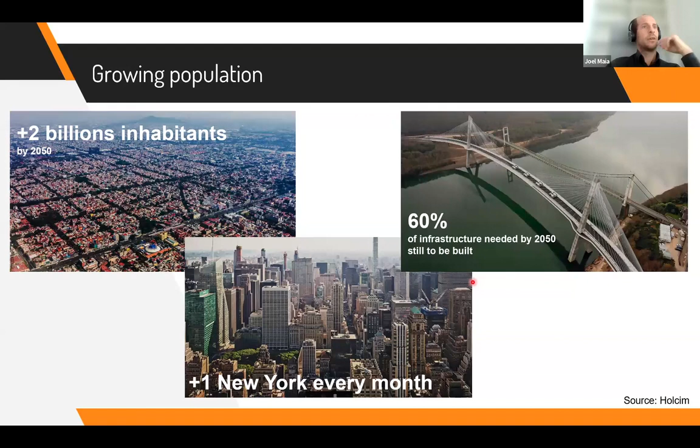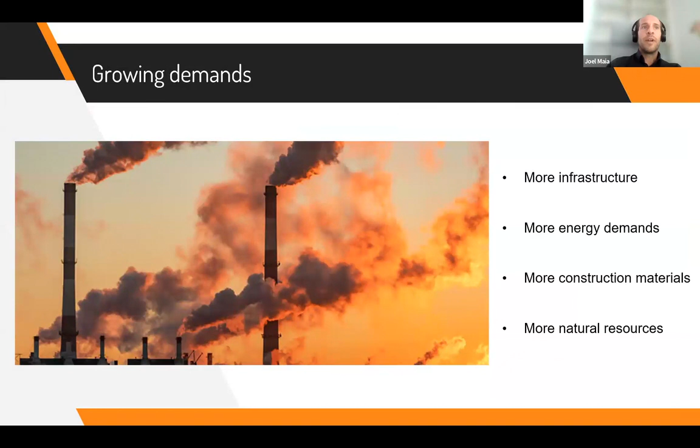Obviously, this growing population also brings some challenges for the planet. This means more infrastructure, more energy demands, more construction materials, and at the end, more natural resources are used for it. So what does this mean for us? This all has an immense impact on the environment, especially global warming, a problem we are all facing these days.

Sorry, this jumped to the wrong slide. One moment, please.

All right, and the question is, okay, are we doomed? Is this the end of the times? The answer is no. But this answer no comes with a big if: if we all do what has to be done. When we say all, it means as individuals. So if we look into the waste hierarchy pyramid, I think there's a lot we can do to avoid the environmental problems that we are facing these days.

Everything we can do on the top of this pyramid is better than what we have to do at the bottom of it. So if we can reduce the use of some resources, that's better. If we cannot reduce the use, we should try to reuse the materials. If we cannot reduce or reuse the materials, we should try to recycle them. All this we can do as individuals very easily. We should obviously avoid the last step, disposal, because this is what stays in the environment for many, many years. It's a combined effort from everybody.

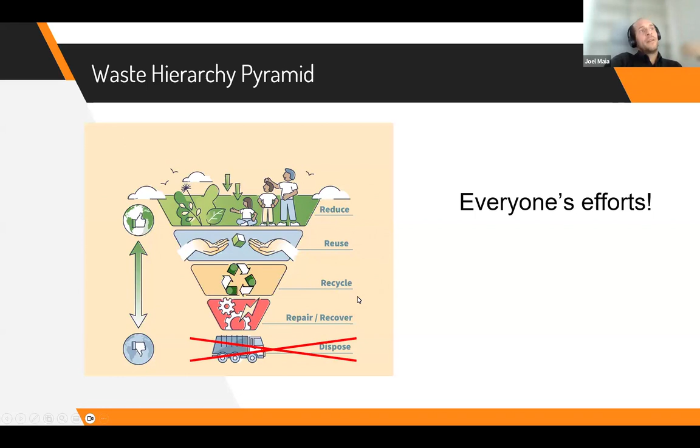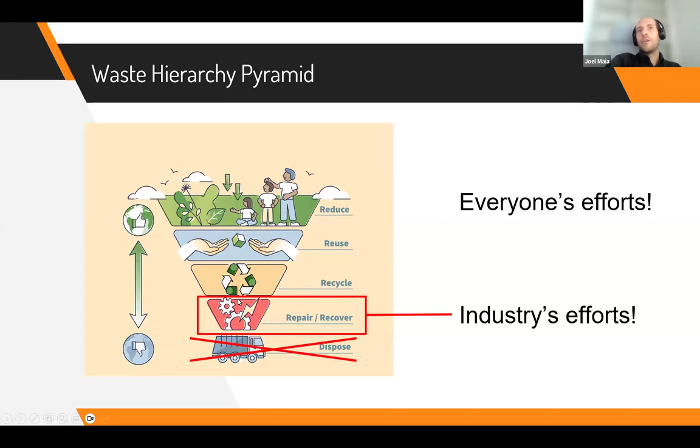Especially in terms of industry, that's where we are all working today. We are focusing on the repair and recovery of materials to be reused as energy sources, for example.

When talking about CO2 emissions, it's well known that cement production is responsible for 6 to 8% of man-made CO2 emissions. Here is a chart showing how this has evolved since the Second World War until some years ago. It has drastically increased. When we look at the million tons of CO2 produced by the cement industry, we can see that part of it is caused by process emissions.

So basically the majority of it is process emissions, from the CO2 from the material itself. Here we can talk about how to reduce it, for example with calcined clay. FCT is also working on the calcined clay business, but it's not the topic of this webinar. If you want more details about calcined clay, you can visit our website or send me an email, and we can schedule a meeting.

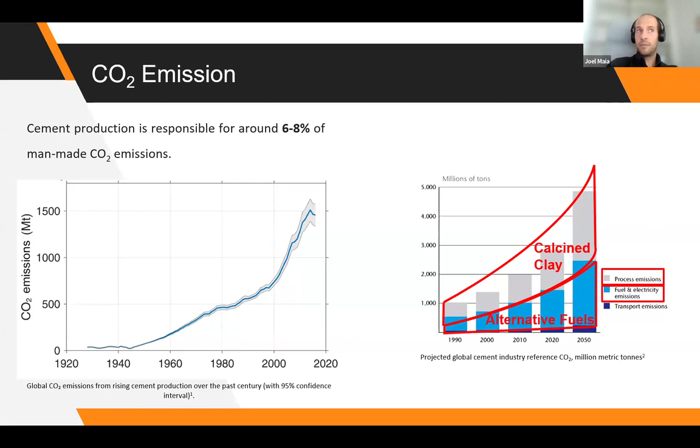There's another part, the blue part, caused by fuel and electricity emissions. Here, for example, one way to reduce it would be the use of alternative fuels.

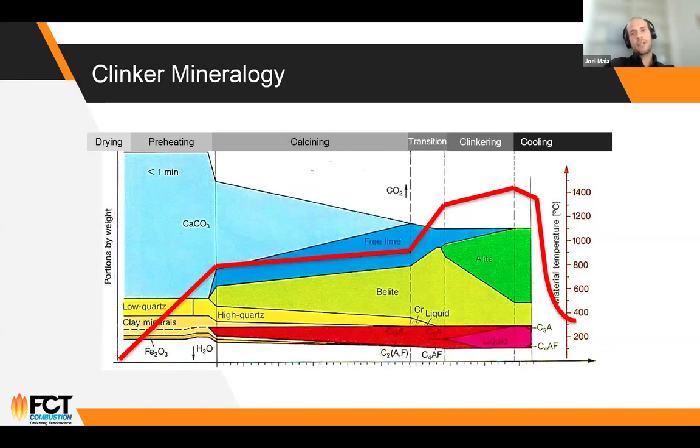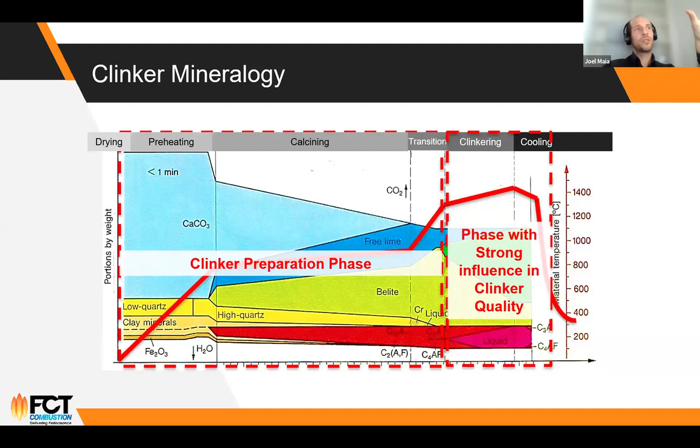We all know this diagram, the clinker mineralogy with the phases of the clinker. There are two main sections that should be highlighted. First, a preparation phase from the drying of the raw material until the transition zone of the kiln, where the raw material is being prepared for clinkerization. Then a second phase that has a very strong influence on clinker quality, and later on cement quality, which incorporates the clinker cooling. We need to make this division because depending on which phase, the alternative fuels will be used in a different way.

When we are talking about the first part, the preparation part, the calciner, choosing an injection point of alternative fuels in the calciner is like choosing a house. When you want to buy a house, you always worry about the neighborhood, the environment around it, the transportation around the area, and so on. For the calciner, injecting alternative fuels is the same.

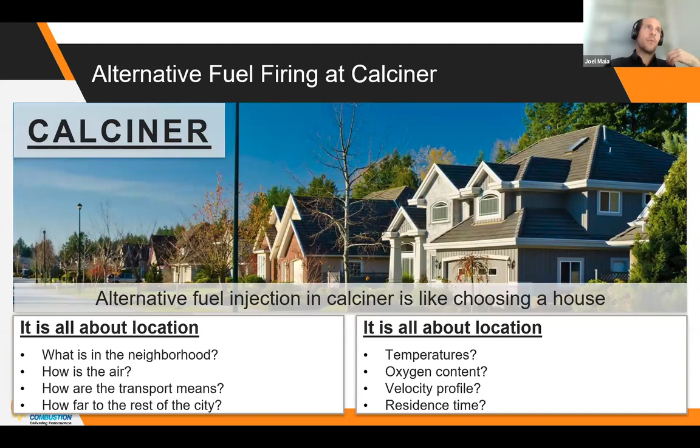So how is the temperature distribution in the calciner? How is the oxygen content in the different areas? What's the velocity profile? What's the residence time? Basically, you are more worried about the flow characteristics inside the calciner. To find the better position to inject your alternative fuels and be able to maximize it, one way to do this would be through a CFD study.

We can also look at results from some CFD studies we made in the past. This would be more for alternative fuels that have good aerodynamic characteristics, meaning they fly together with the gases. In other cases, when we are talking about complete tires and so on, we can talk about a pyrorotor, for example, or some other type of combustion equipment that can deal with larger particle sizes.

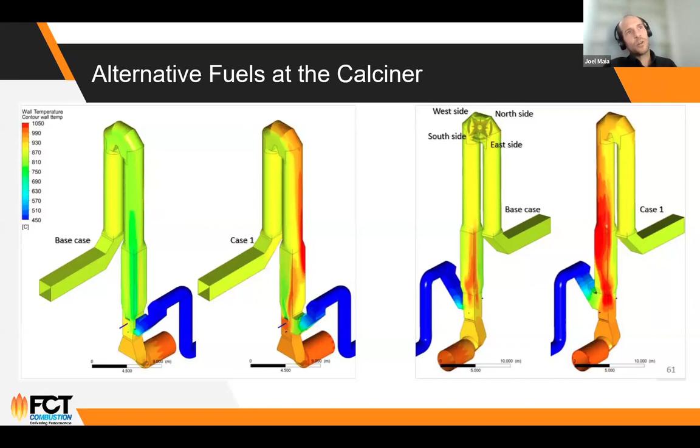But for smaller particle sizes that can fly very well, a CFD study is a good way to check if an existing calciner can deal with the intended alternative fuels, or if a modification is necessary - an enlargement of the calciner, or modifications at the top of the calciner for better mixing, and so on. All of this can be done through CFD. This is not covered by today's presentation. Today we will focus on the kiln.

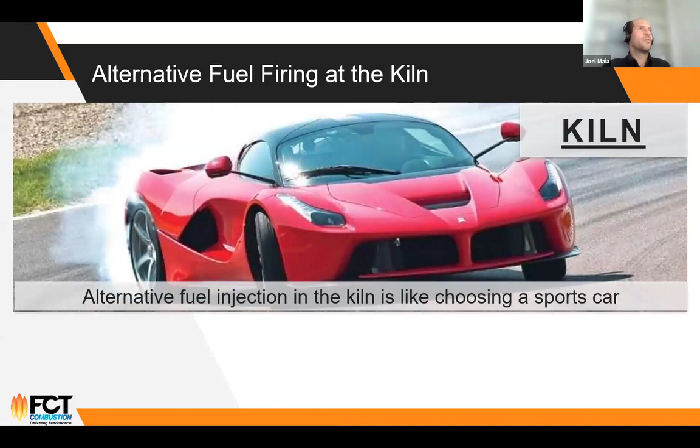There's a difference when we are talking about the kiln. We can make an analogy to a sports car. To my Italian friends watching now, you all know this car. Choosing how to fire the alternative fuels in the kiln is more about performance. If you would buy such a car, you would be worried about which power it has, what's the maximum speed, how efficient aerodynamically it is, how it can turn, and so on.

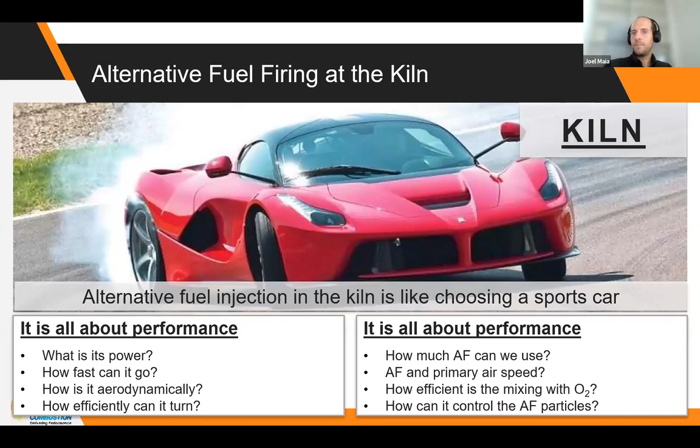It's the same about the burner. If you're injecting alternative fuels in the kiln, you are worried about how much you can use, what is the mixing efficiency of this burner, how you can control the alternative fuel particle direction, and so on. To inject alternative fuels at the kiln side, which is the main topic of this presentation today, there are two main options.

One would be to use a satellite burner in the kiln hood. Let me put a laser pointer here - so the alternative fuel satellite pipe would be positioned a little bit above the burner, in the secondary air. This is a good solution up to a certain point, because the secondary air has the majority of the air required for combustion. Above 95% of the air in the kiln is coming through the secondary air. This is a zone with high temperatures, around 900 to 1000 degrees.

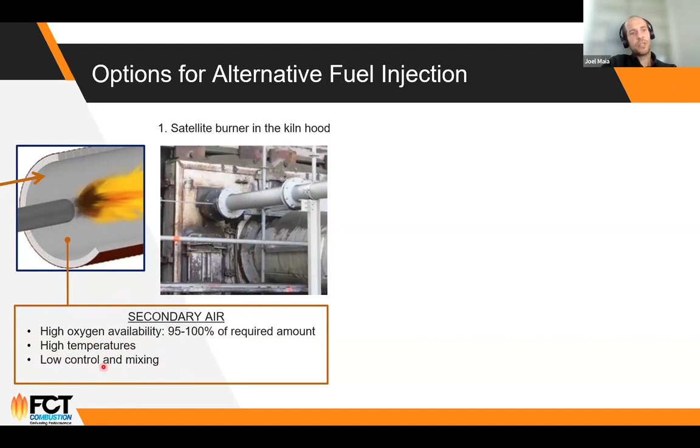There are some benefits to this solution. The main characteristic is that through the burner, you're injecting just a small amount of the air required for combustion—we're talking about 8 to 12%, depending on the type of kiln. At this zone, especially closer to the burner, you have lower temperatures. However, the main advantage is a very high control and intense mixing of the alternative fuel with the remaining air around.

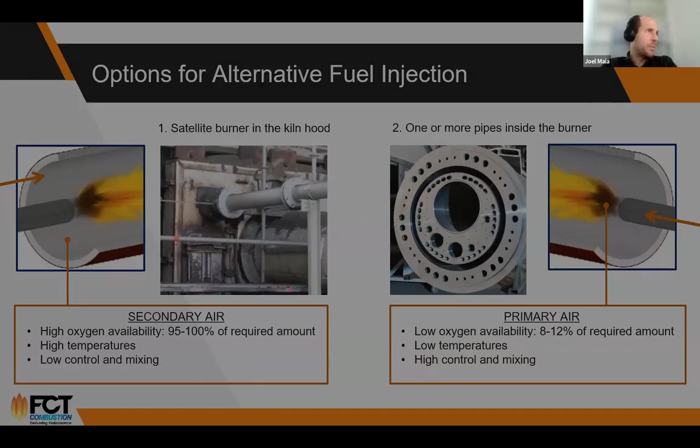Let's talk about the satellite burner first—option number one, injecting alternative fuels on top of the burner directly into the secondary air. This is a rendering of a typical satellite burner. It has an adjustable position in terms of angle, penetration, and so on, mainly to influence the flight path of the particles. You could adjust the position depending on whether you're using a heavier or a lighter particle of alternative fuel. This pipe also has refractory to increase lifetime, and at the front of the satellite burner there's additional air injection through holes, giving extra control over the flight path of particles as well as the combustion.

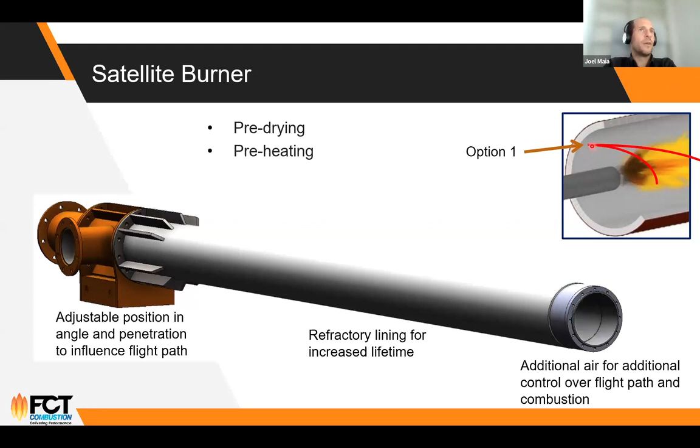The main advantage of this type of satellite burner is that since you're injecting the alternative fuel before it reaches the main flame, there's time between the injection point and the start of combustion, so you get pre-drying while the fuel is flying. You also get preheating, because the alternative fuel is injected into a very hot environment. It's very easy to install, so CapEx is very low. It's the ideal solution to start with alternative fuel at the kiln side—very cheap, very easy to install, fast—and you can get a very fast return on investment while decreasing CO2 emissions almost immediately.

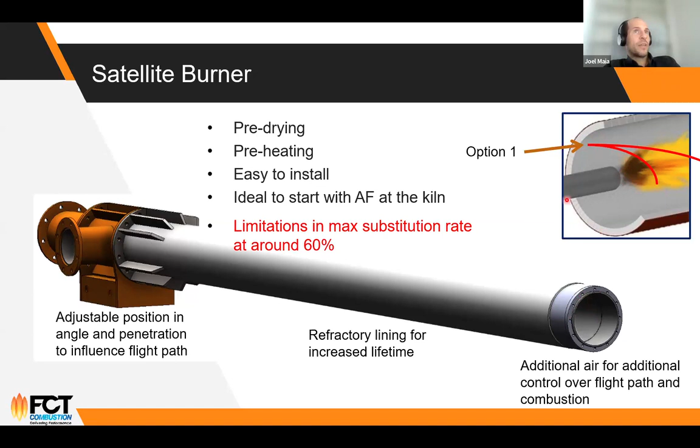However, there's a drawback. This is not the main burner, so when you look inside the kiln, the majority of the fuel should be in the center, but now you're injecting alternative fuel on top of it. So there's a limitation on the substitution rate you can achieve through this pipe. We've seen cases of up to around 60%, but mostly they're in the range of 30 to 45%. The majority of the fuel should still be at the main flame coming from the main burner. When you start shifting too much energy to the satellite burner, you're injecting more fuel through a burner that isn't as capable as the main burner itself, so it starts making not much sense.

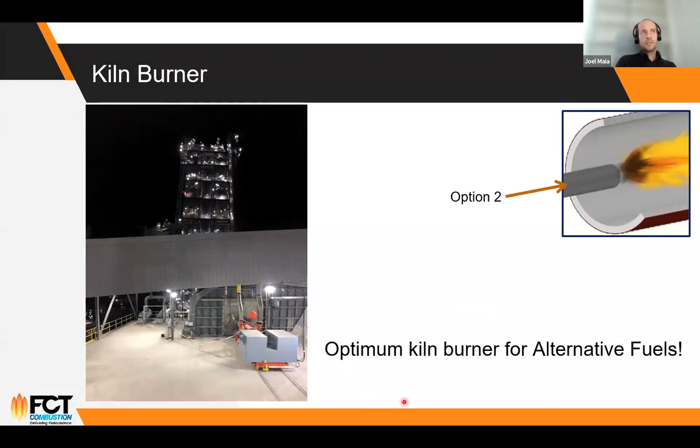Option number two would be to inject the alternative fuel through the burner itself, which needs a burner optimally designed for combustion of alternative fuels. Years ago, we started looking at what this optimum design means, and came to a question: what if we take a standard burner design, like we see here—with axial air, coal, pet coke, lignite, and a swirl air channel—and change the arrangement of the axial air?

So again, the same picture. Something is going on here with the presentation. Let me go back to the correct slide. I'm not sure why this is happening. One moment. Sorry for that. Let's try again.

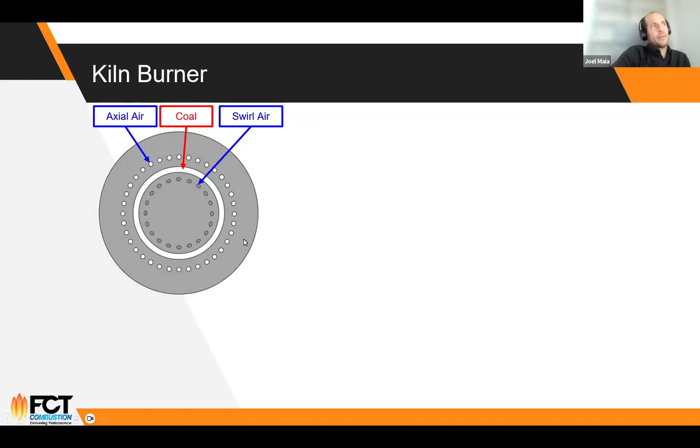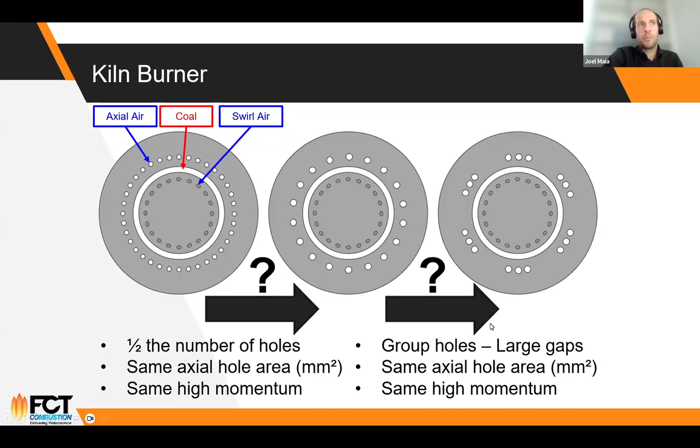Our question was, what happens if we change the arrangement of the axial air? First, we studied the difference when keeping the same amount of axial air, same injection area, same speed, same pressure, but just changing the number of holes—from 36 down to half, to 18 holes, a bit bigger since the area stays the same but the number differs. Then the next question was, what happens if we take these holes and group them three by three, leaving a large empty area in between? We have a CFD department in our company, so we studied this first in CFD.

So from the CFD, among many other parameters, we can get results like the radiation from the flame to the clinker. It would be a chart like this. Here at 0 would be the burner, at 17 is the kiln inlet, and on the vertical axis we can see the radiation from the flame to the clinker.

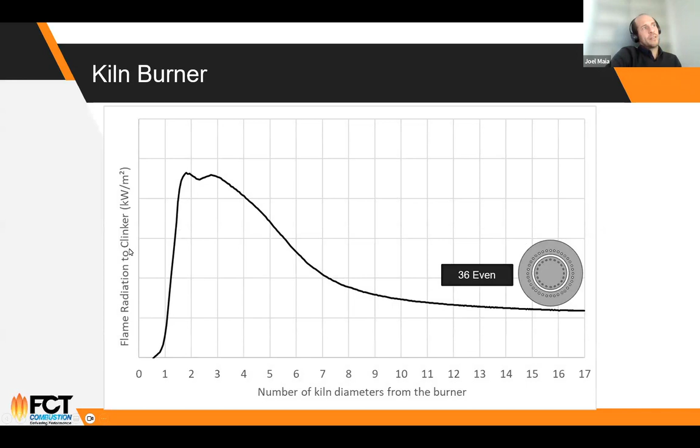From this chart, there are two main parameters that we can read. One would be the peak value of the radiation, and the second would be the area below the curve near the clinkerization zone, which shows how much energy is transferred to the clinker in that zone.

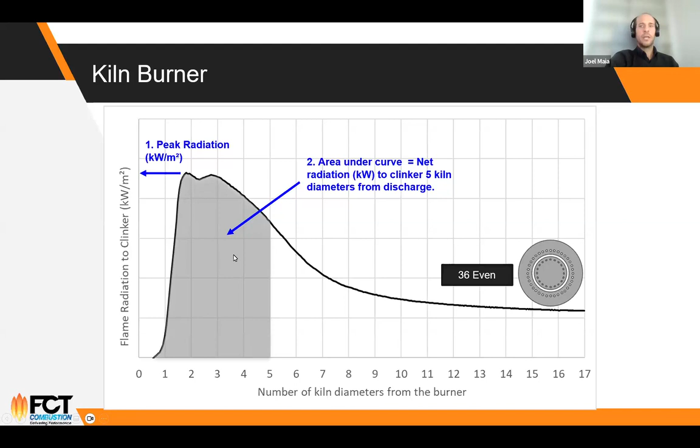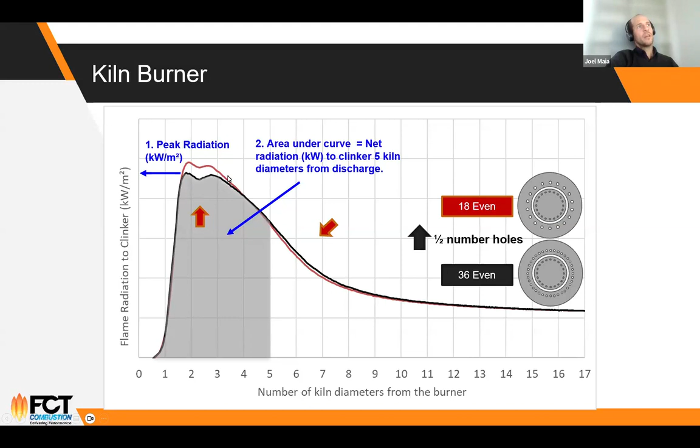If we look at this chart, this is the typical burner. We compare it to the burner with larger holes in a smaller quantity. We can see that the peak radiation increases, and the flame later, after the clinkerization zone, gets colder, so the flame is a little bit shorter. Comparing this to the next option, grouping the orifices 3 by 3, we see a further increase in radiation and a further reduction of the flame length.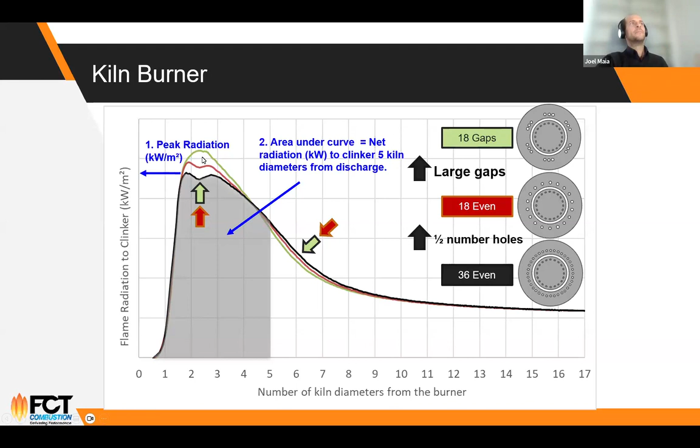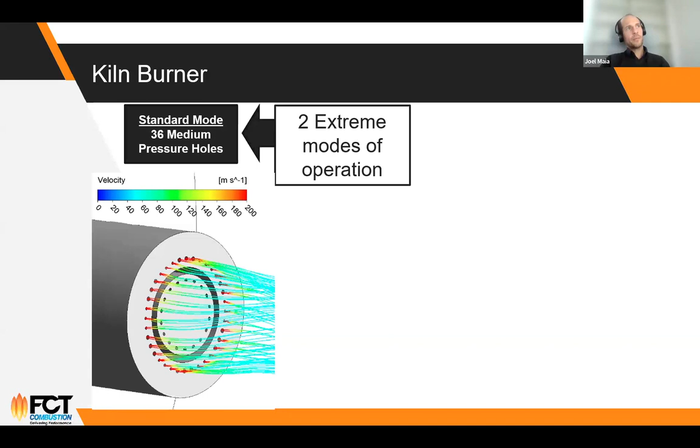So what was the solution that we found? We can have the same burner operating in two extreme modes. One mode would be what we call standard mode, in which we have air being supplied through all axial air orifices. This generates a milder flame, not so intense, suitable for operation with traditional fuels. Then, closing a valve outside the burner, you don't stop it, you reduce it to a minimum, because you still supply a little bit of air for cooling and to avoid clogging, but from process purposes this amount of air is very small.

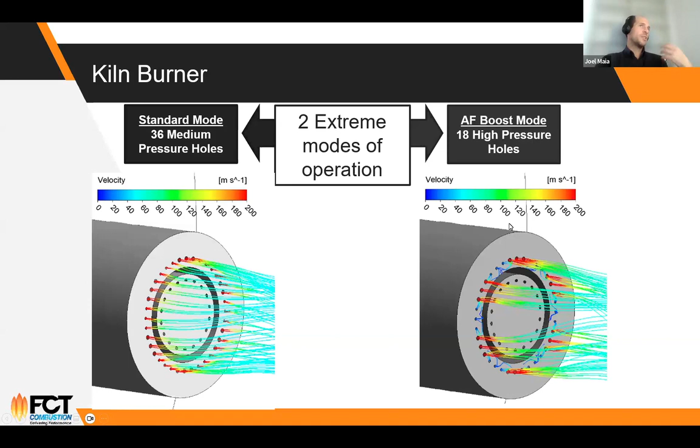And then you're supplying the majority of the air to these 3 by 3 orifices. With this, you create a higher speed, and also you create a gap through where secondary air is sucked inside the flame, giving you a much more intense, much shorter flame, suitable for the use of alternative fuels.

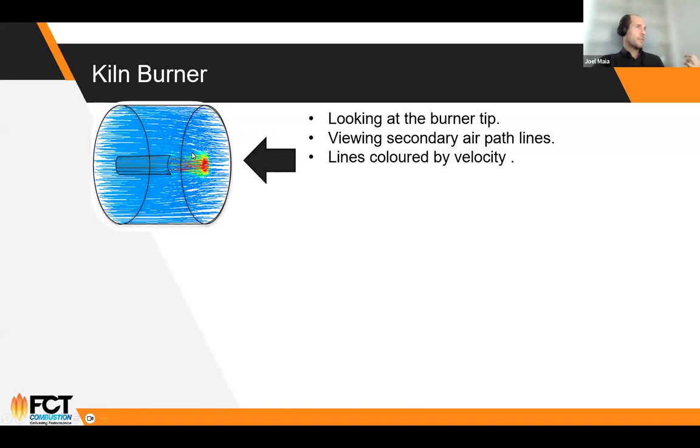Just to illustrate this a little more, these are the lines of the secondary air only, you cannot see fuel or anything else here. If we take a section a little in front of the burner, we can see that in the standard mode there is a certain quantity of air coming inside the flame. And when we engage the boost mode for alternative fuels, we can see that there's much more secondary air coming to the flame.

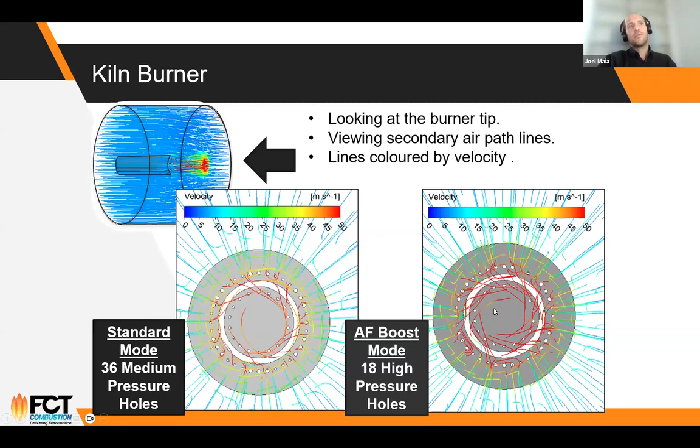This is especially important because, as I mentioned before, the majority of the oxygen required for the combustion comes from the secondary air. So the faster you can draw secondary air into the flame, the faster will be the combustion of your alternative fuels.

There are also other additional features, like some lofting air, as we call it, for alternative fuels. You can see these small holes injecting air at the end of the alternative fuel pipe, shown here in the picture. We divide them into two groups, the pink lines on top and the green lines on the bottom. They can be controlled separately, mainly because alternative fuels change from time to time.

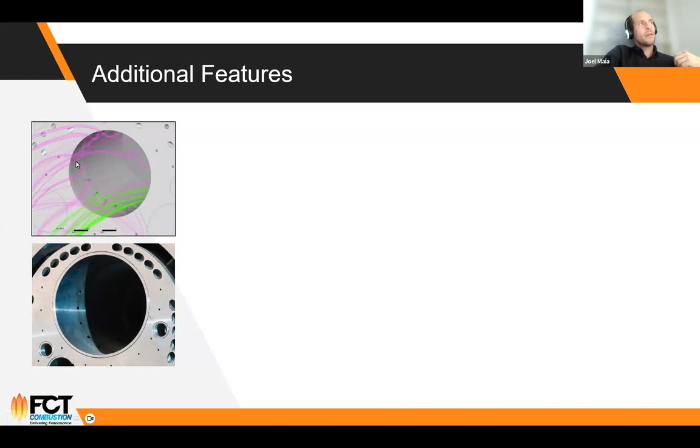If you're talking about a heavy, more 3D alternative fuel, we would use this green injection of air mainly to lift the fuel itself. And if we are talking about a lighter fuel, like a good RDF, we would use both the pink and the green, basically to disperse the fuel in all directions.

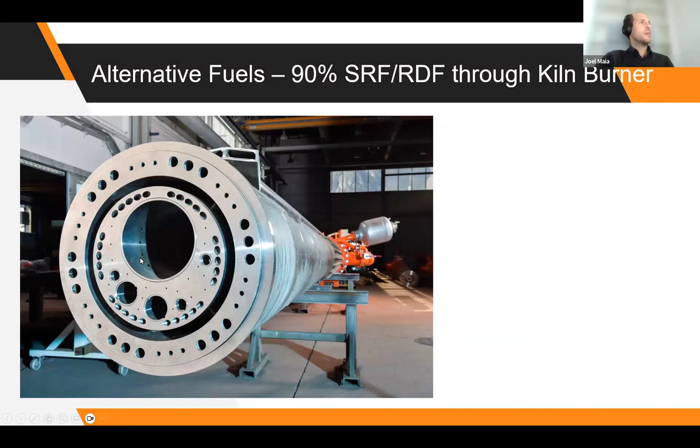This is one of these burners, TurboFlex, as we call it. You can see the different size and position of the axial air holes. You can also see the lofting air inside. With this, we can achieve up to 90% SRF RDF through the kiln burner itself.

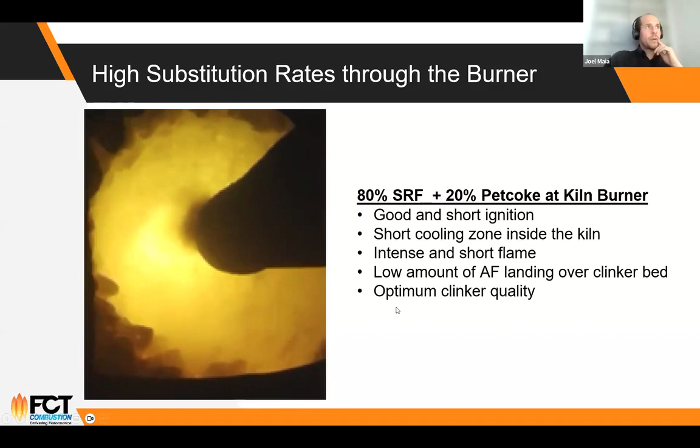So this was more or less the topic for today. I'll just go through the company quickly in the next 2 minutes, 1 minute.

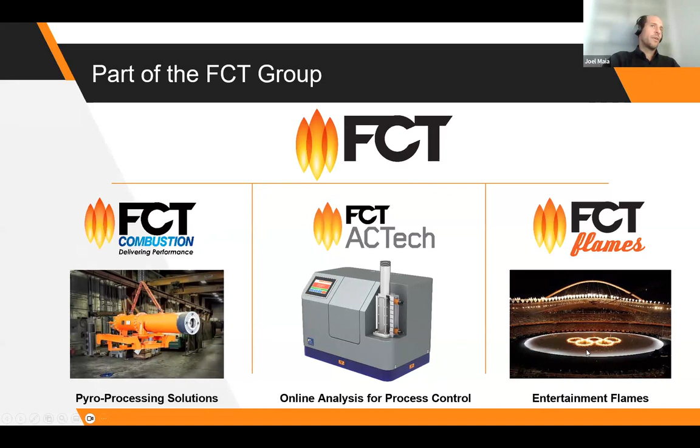FCT, we are a group of 3 companies. One is FCT Combustion, dealing with everything related to combustion for heavy industries, for example alternative fuels, kiln burners, calcined clay, hydrogen, and so on. FCT ACTech makes online process control equipment, and FCT Flames makes entertainment flames for Olympic Games, for example. Our company is from 1984.

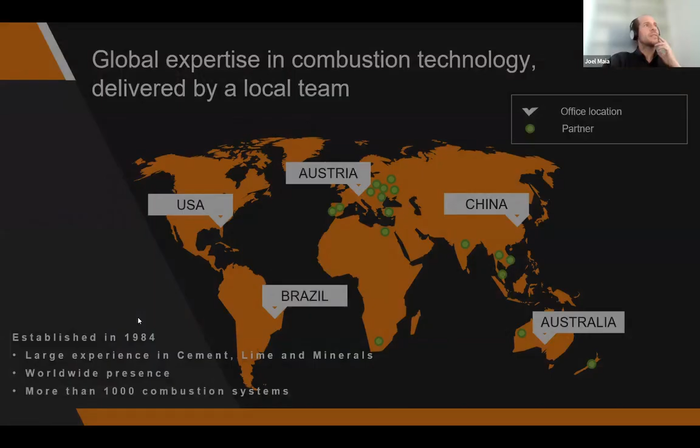We are experienced in several industries, mainly cement, lime, and minerals, worldwide presence. We can see our 5 main offices here on the screen, and we have more than 1,000 combustion systems as references. We are serving different industries: cement, iron ore, lime, pulp and paper, mining, lithium, bauxite, etc.

The main advantage of this is that we can make a crossover of technologies between one industry and the other.

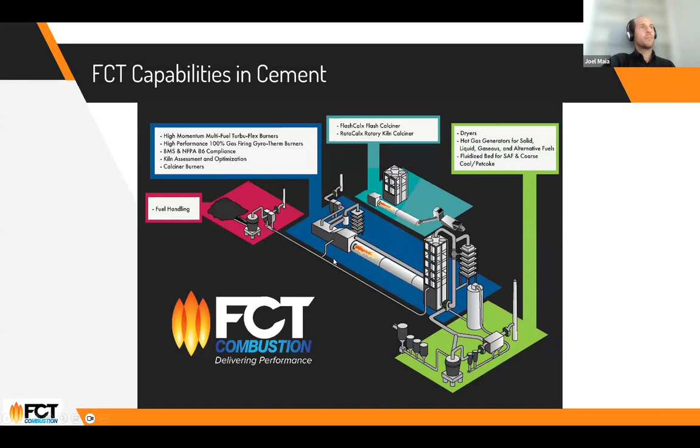Speaking about the cement plant, we have a group of engineers now able to help in different parts of the plant. So fuel handling, pyroprocess line itself, calcined clay, and gas treatment systems.

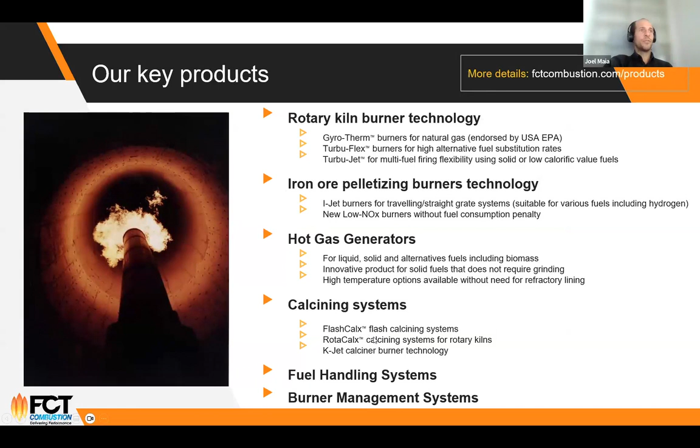Here are some of our key products. I won't go into details here for lack of time, but different technologies for rotary kiln burners, hot gas generators, different types, calcining systems including rotary kiln and flash calciners for calcined clay, fuel handling systems, burner management systems, different types of services like audits, CFD, and so on.

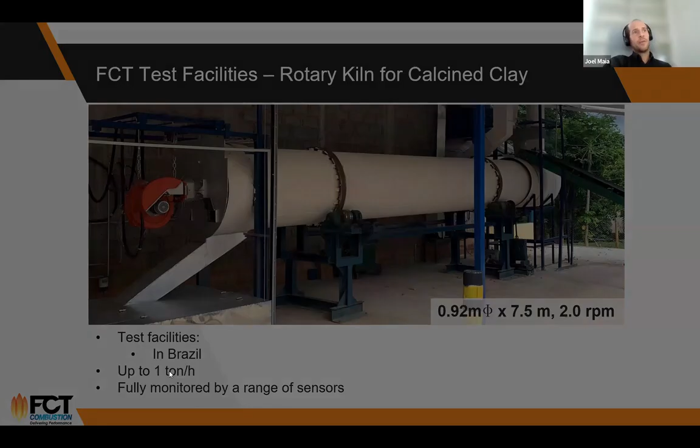Including when we're talking about clay, we have 2 test facilities in Brazil. One would be a rotary kiln for up to 1 ton per hour. Another would be a flash calciner up to 50 kilograms per hour.